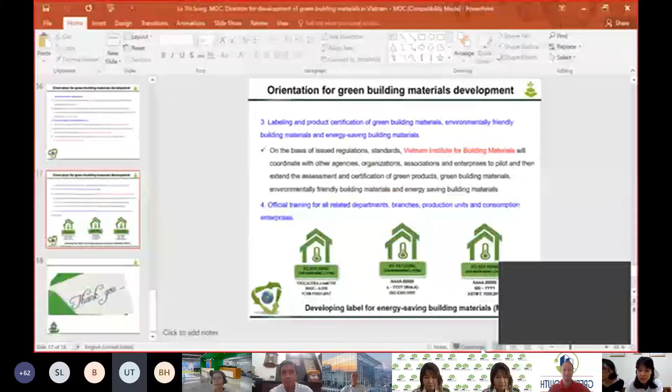Okay, so thank you so much for the introduction. And firstly, I would like to share my screen. Can you see my screen? Yes, we can see it. Okay, so I would like to start.

First of all, thank you so much for the invitation for me to join the conference today. And I would like to talk about the direction for green building materials development in Vietnam. My presentation has four parts: introduction, regulation, implementation status, and the orientation for green building material development.

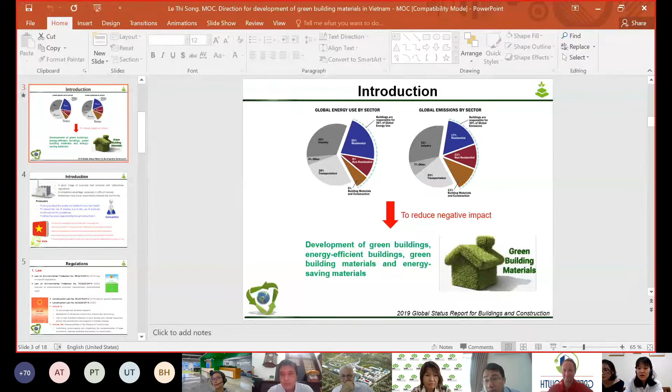Hello, can you hear? There's a little bit of an echo. I hear the sound of something. Hello, can you hear me? If you have two computers in the same place, you need to mute and turn off the speaker of one and just use one. Is it okay? I think it's better now. Yeah, it's fine now.

Okay, so I would like to continue. According to the global status report for building and constructions, buildings are responsible for 36% of global energy use and also 39% of global emissions. So to reduce the negative impact, many countries in the world have developed programs for green building certification and energy efficiency building certification, and the most effective way is to use green building materials.

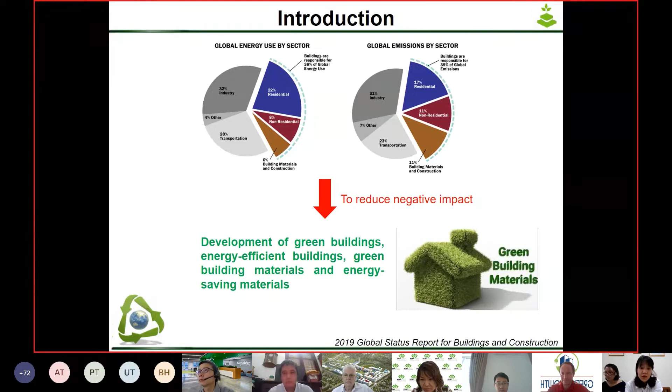As you may know, green building materials have many benefits, and here are some examples. For producers, using green materials creates a good image of a business that complies with Vietnamese regulation, and also creates a competitive advantage, especially in difficult markets. For consumers, using green materials ensures quality and safety for health, and reduces the risk of disease due to the use of products containing harmful substances. And for the state, the development of green building materials will promote sustainable production and consumption, reduce pollution to the environment, and improve environmental quality, and so on.

So in Vietnam, the government has also issued many policies to promote the use of green building materials. Here I show you some main regulations. Firstly, we have the law system.

The Environmental Protection Law No. 55, issued in 2014, has no specific regulation on this. However, the version published in 2020 is the first time the development of environmental economics and environmental audit is mentioned.

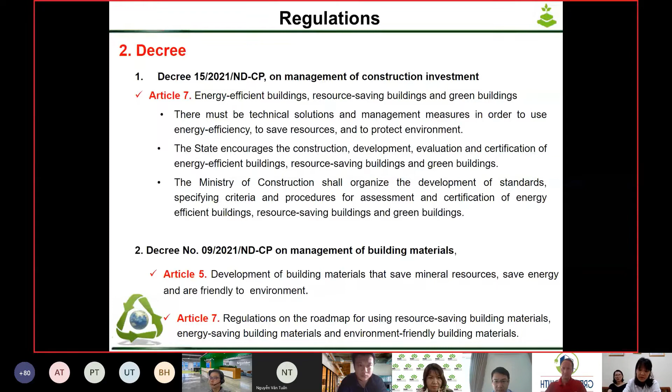Next, we have Decree No. 9, published in 2021 by the government, on management of building materials. There are main points in this decree: Article 5 deals with development of building materials that save mineral resources, save energy, and are environmentally friendly. Article 7 emphasizes the regulation on the roadmap for using resource saving building materials, energy saving building materials, and environmentally friendly building materials.

Next, we have decisions. Decision No. 1216, published by the government in 2012, on the National Strategy for Environmental Protection to 2020 with a Vision to 2030, and also the draft version of this, which is now under consideration and will be published soon next year. Both emphasize that by 2030, they will ensure environmental security and build and develop a green and low carbon economy.

Decision No. 1393, published in 2012 by the government, deals with the national green growth strategy. This decision emphasizes green growth towards a low carbon economy.

Another decision, No. 253, published in 2009 by the Ministry of Natural Resources and Environment, deals with the program of granting eco-labels, the Vietnam Green Environmental Labeling Program, also referred to as the Vietnam Green Label.

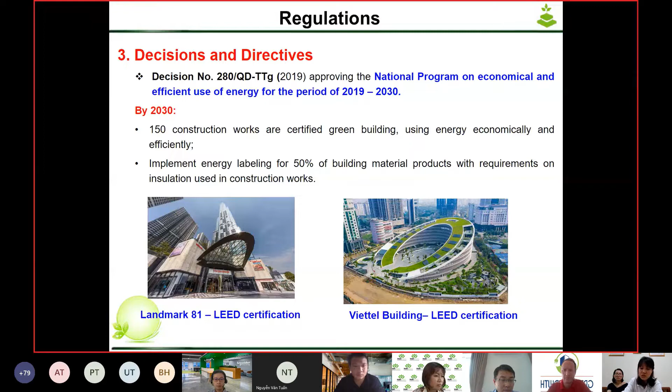For the regulation system, we also have technical regulations and standards. The National Technical Regulation on Energy Efficiency Buildings, QCVN 09, was published in 2017 by the Ministry of Construction.

This national regulation indicates that construction with a total floor area of more than 2,500 square meters must meet requirements for the building envelope, as shown here. For example, for the roof, the maximum thermal transmittance should be 1.0, and for walls, doors, and windows, the maximum thermal transmittance should be 1.8.

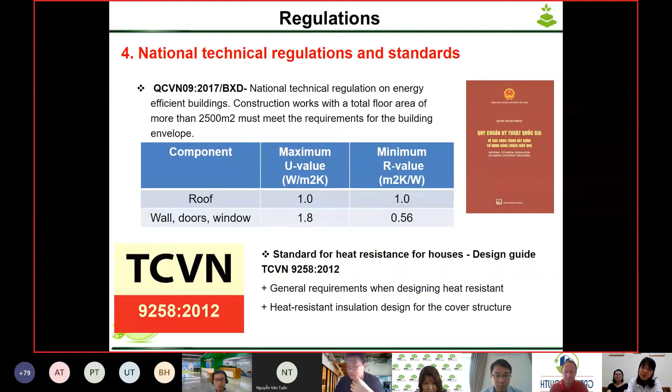We also have a standard for heat resistance for houses, named TCVN 9258, published in 2012. That's all the main regulations relating to the development of green building materials.

I would like to focus on the second part, which is the current implementation status of green building materials in Vietnam. Firstly, the implementation of evaluation and certification of green products.

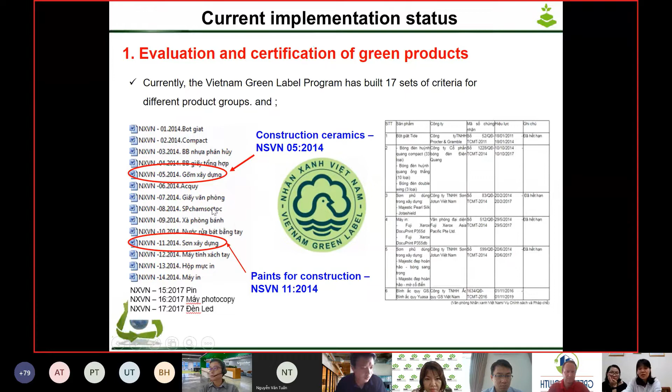Implementation of evaluation and certification systems for green buildings. Currently in Vietnam, there are 5 sets of tools and organizations for evaluating and certifying green buildings that use energy economically and efficiently.

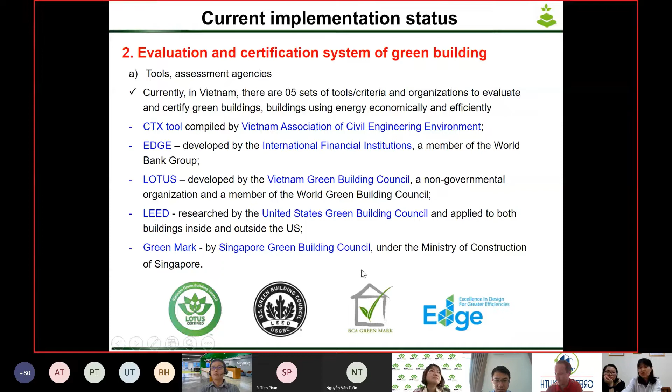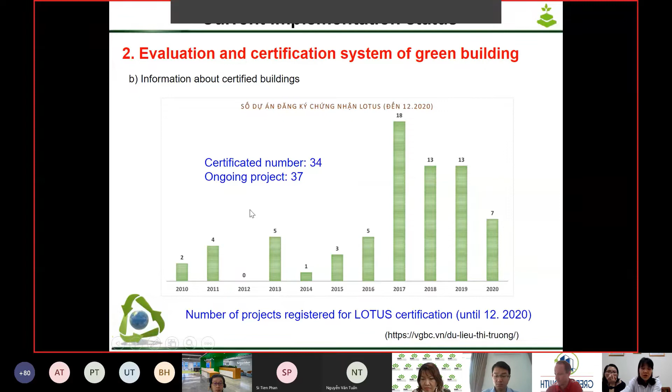This slide shows the number of buildings that received LOTUS certification until 2020. From this data, we can see that until 2020, there are 34 buildings that received certification from LOTUS, and about 37 buildings are on the way to getting certification.

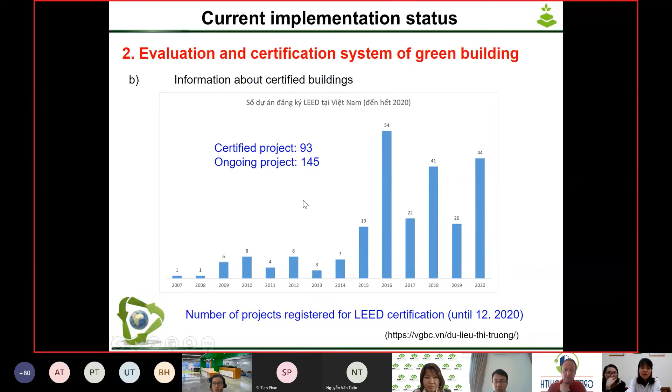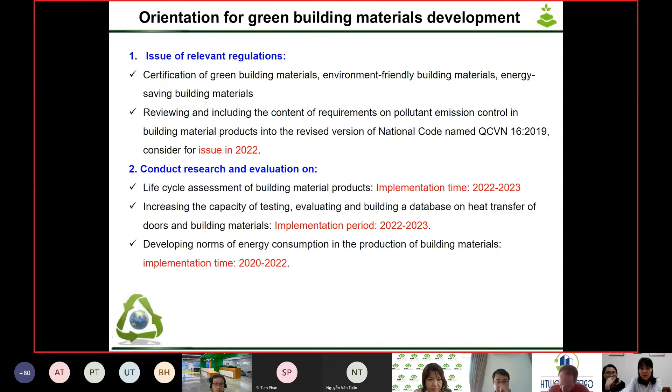That concludes our current implementation status. I will move to the last part, which is orientation for green building material development, because using green building materials has many benefits, as I showed you before. So Vietnam is taking many actions to promote the use of green building materials. Here I'll show you some of the main actions.

Firstly, the government will continuously issue related regulations on certification of green building materials, environmentally friendly building materials, and energy-saving building materials. Also, continuously reviewing and improving the content on pollution emission control in building material products in the revised version of National Code QCVN 16, which was published in 2019 and will be considered for issuance in 2022.

The second main action of government is to conduct research and evaluation on life cycle assessment of building material products, increasing testing and evaluation capacity, building a database on heat transfer of doors and building materials, and developing norms for energy consumption in the production of building materials. These actions will take place in the period of 2020 to 2022-2023.

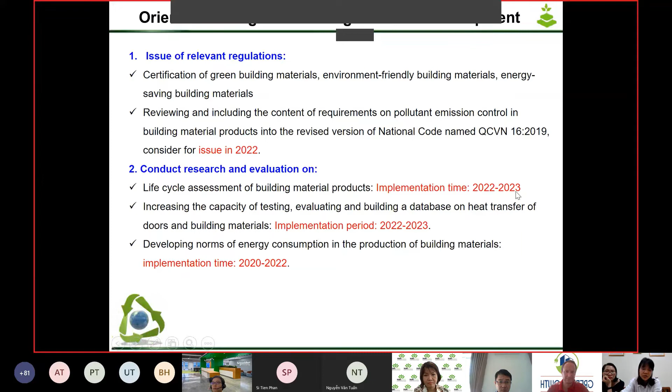The third main action is the labeling and product certification of green building materials, environmentally friendly building materials, and energy-saving building materials. On the basis of issued regulations and standards, Vietnam Institute for Building Materials will coordinate with other partners to pilot and then extend the assessment and certification of green products, green building materials, and energy-saving building materials.

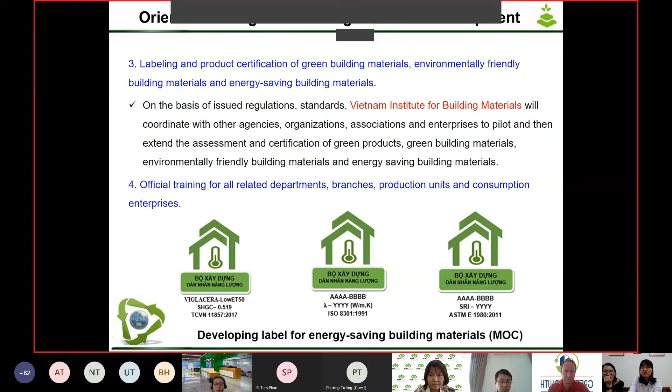The last main action is conducting official training for all related departments, branches, production units, and consumption enterprises to promote the use of green building materials. Is that all for my presentation today? Thank you so much for listening.

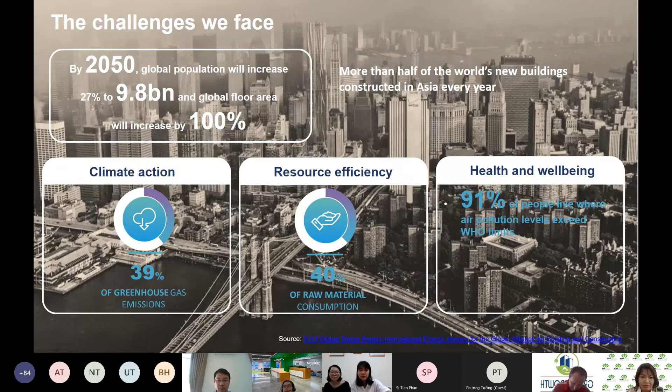Inefficient and unhealthy buildings also negatively affect our health and well-being. 91% of people live where air pollution levels exceed the WHO limit.

Hence, to meet the United Nations Sustainable Development Goals, the World Green Building Council has set a strategy for a few years now focused on three key areas: climate action, resource and circularity, and health and well-being, to drive the impact from the building and construction sector. The World Green Building Council will work with local Green Building Councils around the world to implement the strategy at the local level.

So in this presentation, I would like to discuss the challenges as well as the solutions. How can we implement this strategy? Let's start with climate action.

In 2018, the World Green Building Council initiated the Advancing Net Zero Carbon project. It is a global project working towards sector decarbonization by 2050, and it aims for two milestones. By 2030, all new buildings and renovations will have at least 40% less embodied carbon, and all new buildings will be net zero operational carbon. By 2050, new buildings, infrastructure and renovations will have net zero embodied carbon, and all buildings, including existing buildings, must be net zero operational carbon.

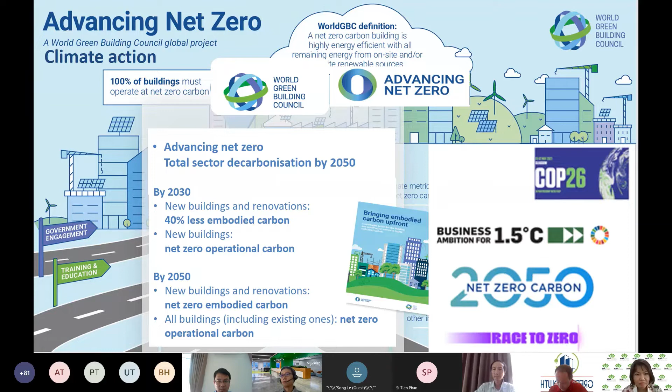So let's have a look at the definition of embodied and operational carbon to bring everybody on the same page. You see here in the picture a representation of the whole life cycle of a building. When we're talking about operational carbon, we refer to the carbon emissions directly or indirectly during the use phase of a building, meaning the energy we use for heating, cooling, and electrical appliances inside the building during its use phase.

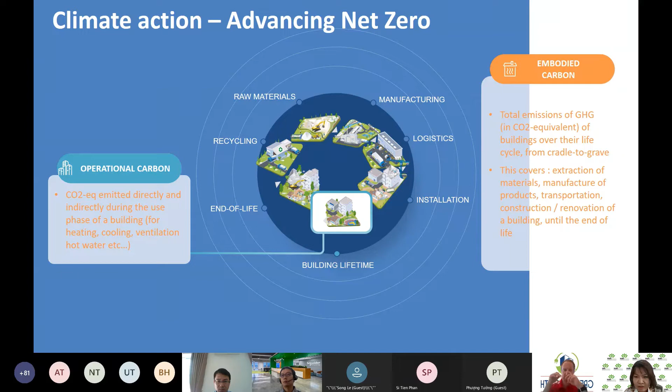Embodied carbon refers to the total emissions of a building over their lifetime, including the manufacturing of raw materials, the construction or renovation of a building, until its end of life. So now our key question: how can we achieve the net zero ambitions?

The answer is we need to reduce carbon emissions at all stages of a building's whole life cycle. So there are three key measures that we can look at. The first is better energy efficiency for the building.

Through deep renovation of existing buildings to reduce energy consumption, we can enhance the thermal insulation of a building envelope, better design with facade orientation, green roofs, or use appliances which have energy efficiency. So energy efficiency is the core driver to reduce operational carbon emissions.

Dr. Song had mentioned a lot about building codes and decrees. These are very crucial to drive this energy efficiency target. Especially in Vietnam, we already have the QCVN 09, the standard that stipulates the requirement for energy efficiency of the building.

The second strategy is we switch to renewable energies as much as possible. In 2017, solar energy played almost no part in Vietnam's energy strategy. But by the end of 2019, Vietnam has surpassed Malaysia and Thailand to reach the largest installed capacity of solar panels in Southeast Asia. So there is a hope for us.

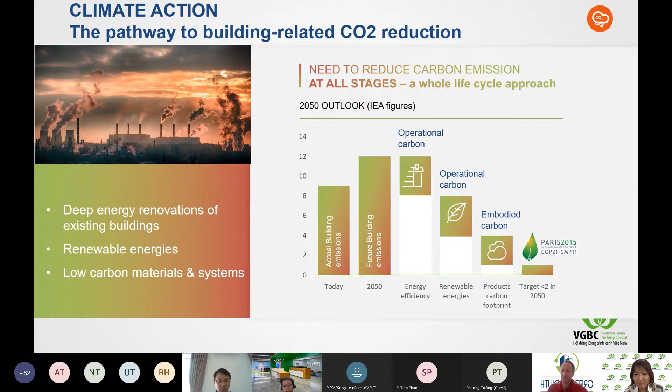The second focus area here is resource and circularity. You can see in this chart, elaborated by the United Nations, that the consumption of resources we use has grown over the years with an acceleration since 2000. The total global extraction in 2017 was 92 billion tons. Compared to 1970's 27 billion tons, it has increased 3 times, while our global population only increased 2 times.

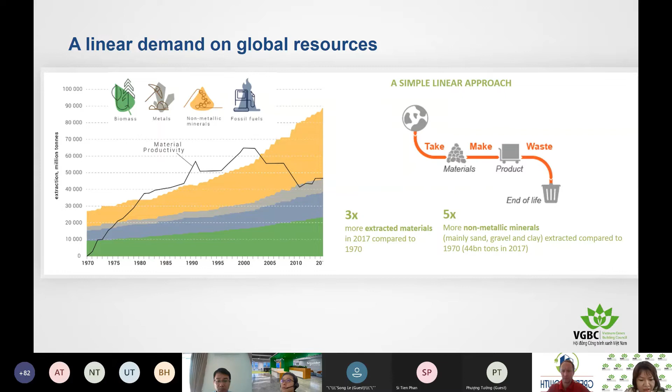And if you look at the charts, you can see 2 important pieces of information here. First, the extraction of non-metallic minerals, shown here in orange, has increased 5 times since 1970. Non-metallic minerals mean sands, gravels, clays - main materials we use in buildings. The second thing we can extract from this chart is the material productivity, meaning the economic output generated per ton of material consumed, has not progressed, has not increased since 2000, represented by the black line here.

So there are consequences of a linear economic approach that we are in, where we take, make, and dispose.

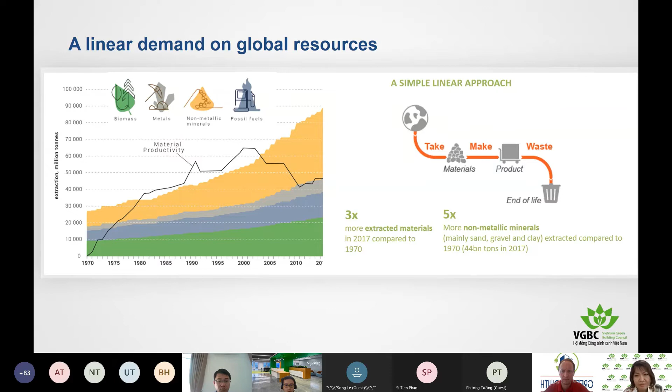If we zoom into sand, which is the most exploited resource worldwide after water, the number one purpose of sand extraction is for concrete, but only less than 5% of the world's sand supply can be used for concrete. My friend Bruno from NC can comment here, but desert sand is too smooth to stick with cement. There's only marine sand or river sand suitable for construction, but we are consuming 2 times more than what normal erosion can produce. And over the last 30 years, the sand demand has grown by 360%, and it will continue to do so.

And we already witnessed the consequences of sand depletion happening everywhere in Vietnam. And behind this situation, with the growth in resource extraction and more waste landfill, it's not only leading to the obsolescence of many virgin resources, but it's also worsening our ecological footprint, the loss of biodiversity, environmental and climate impact - what we can observe daily - as well as negative impact to human health.

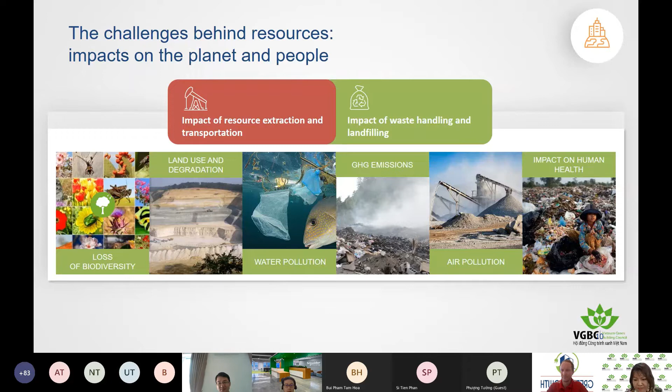And to address these challenges, the only way we can move forward is changing the approach, changing the business model from linear economy to circular economy.

And there are also several business opportunities that circular economy is able to provide. If waste becomes the secondary resource, and circularity is a business model, then waste recycling service can be a business opportunity, and we can capture the secondary resource from the source.

And beyond the traditional way of producing and selling, circular economy also generates a new business model whereby, as a manufacturer, we can provide product as a service. This model has already been done by several businesses like Michelin - they're not selling tires, but they sell the kilometers of usage of tires for trucks, for example. Or some lighting companies, they sell light as a service.

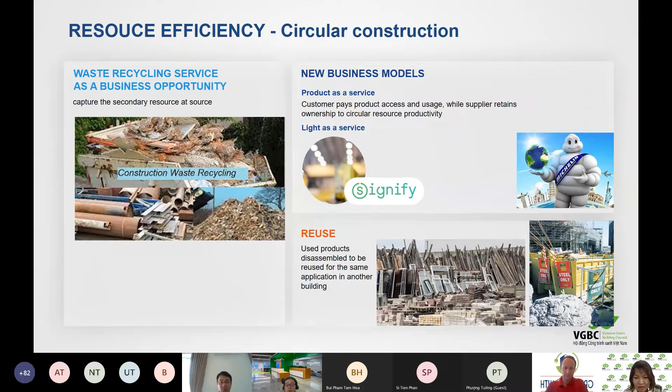The other model is reusing. When we are talking about materials that are supposed to last a long time, this material can be disassembled and reused in a new building when the old building is no longer required.

But to use this approach effectively, it involves the whole value chain of a project. It requires changing the mindset from the architect - design the building so it can be dismantled, design for deconstruction. And for the real estate investor, offer circular building because of the added value. For the contractor, focus on reuse and sustainable building methods and materials.

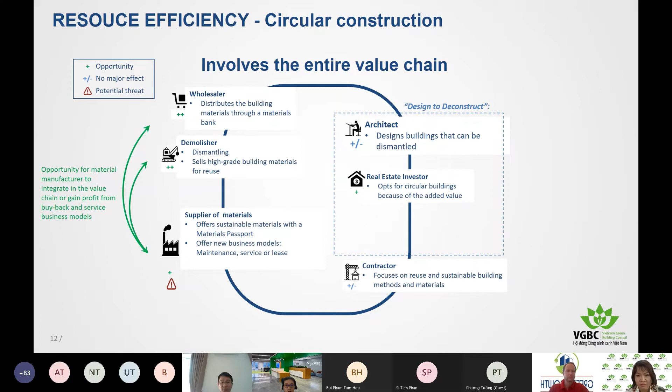The third focus area, last but not least, is health and well-being. Better Places for People is creating causal global projects to analyze the impact of green buildings around the world on the health, well-being, and productivity of people living within them. In the past 5 years, they have published reports on a variety of building types, including retail, homes, schools, and offices. All these case studies demonstrate that the chance of providing positive health benefits for end users is actually taking shape around the world, and there's a strong link between green buildings and the productivity of occupants.

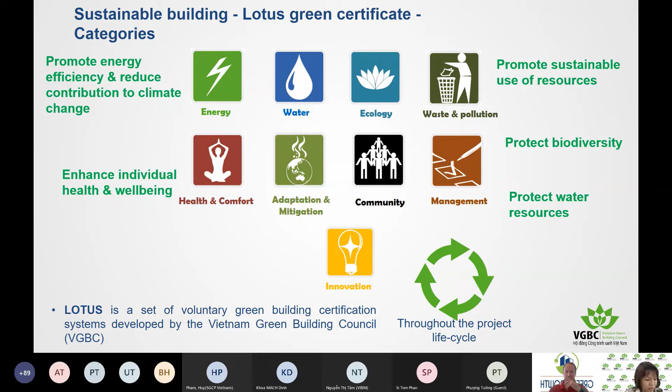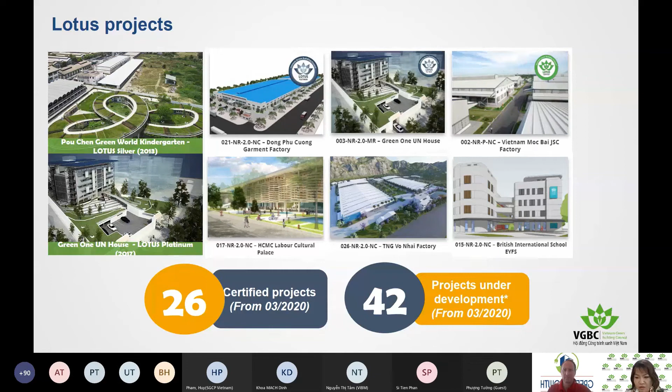Here is some example of Lotus projects in 2020, and I would like to have a close look at the case study of one green building to analyze the environmental impact of a green building. So this case is the Green One UN House. This is a Lotus Platinum project completed in 2017.

In this project, they use 35% of total roof area as green roof, and 77% of landscape that limit the heat island effect. Thanks to this feature, it reduced 29% of energy use. Although they have a lot of landscape and green roof, they still achieve a 44% reduction of water use through the fixture and recycling water system. In this building, they also use 94% reused structure, and on top of the building they have solar panels that produce 110,000 kilowatt-hours per year.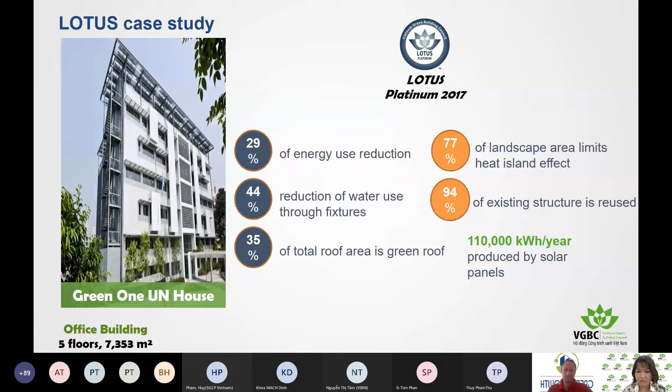So, in summary, we have talked about the 3 global challenges, the 3 global changes that are climate action, resource circularity, and health and well-being. These are the new changes that will redefine how we approach the construction business today, and business as usual is no longer an option. We want new buildings to have low operational and low embodied carbon, using renewable energy. We want buildings using recycled resources, designed to be reused, designed to be dismantled, not to be landfilled anymore. Buildings that provide health and comfort for users, for community. We all share a deep sense of responsibility for the future. Choosing green building will help us achieve those global targets towards a more sustainable world.

So please join us in creating green building for everyone, everywhere. Thank you.

Excellent. Thank you very much, Ms. Hung. Your presentation was really extremely rich in terms of the challenges out there, but also in terms of potential solutions. I think what really stuck out for me is that we really have to collaborate across the complete value chain. Exactly, I think everybody can contribute their part to that.

In terms of the value chain, what we intended to have was a nice coverage in our webinar across this value chain. Normally we would have Sergio, representing the architects, speaking to us now, but literally 10 minutes before our webinar, one of his co-workers called me saying that his wife is about to deliver a baby, and he had to go to the hospital urgently. So unfortunately he cannot be with us here, and the company Saraiva and Associados were not able to give us another speaker to get us through the slides. So very unfortunately, we have to skip this part. The slides will be included, and the contact details for Sergio will be there as well, but unfortunately we cannot hear him talking about the role of the architect. It's a real pity, but yes, that's life, right? We cannot plan everything - well, we can plan, but it might turn out a little bit different.

So unfortunately we have to skip this part, but I would like now to go one step further and talk a little bit from the perspective of a construction material supplier, of INSEE actually, and how INSEE can contribute to a green environment and sustainable cities. I hope you can see my slides and hear me clearly - if not, please shout out. So we heard a lot, especially in the last presentation from Ms. Hung, that construction materials can play a very important role when it comes to green buildings and green cities.

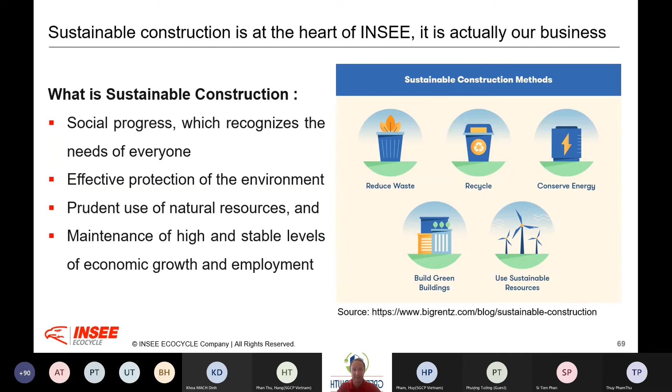So sustainable construction, to be honest, is actually really at the heart of INSEE. It's actually our business, and I will try to explain a little bit what we are doing with regards to that. So there are 5 techniques, according to this website, that are having an impact on sustainable building, and I would like to showcase a little bit on how INSEE is addressing this.

So first, prefabricating materials in controlled environments. So the modular concept, we have been hearing a lot about this as well. This definitely has improved the quality of the buildings, and it can result in much less waste.

Second point is construction waste management. This has been highlighted by Hung very clearly as well, that this is a field where there's a lot of potential to develop, especially here in Vietnam. I believe here we are really just at the very start of doing this. In other more developed economies, there is already a better market for this construction waste management.

Then there is a lot we can do at site in terms of improving the environment, and I will show you a few examples around this. I will show you as well a bit on lean and green manufacturing and how we can reduce the energy and resources we use to produce our construction materials.

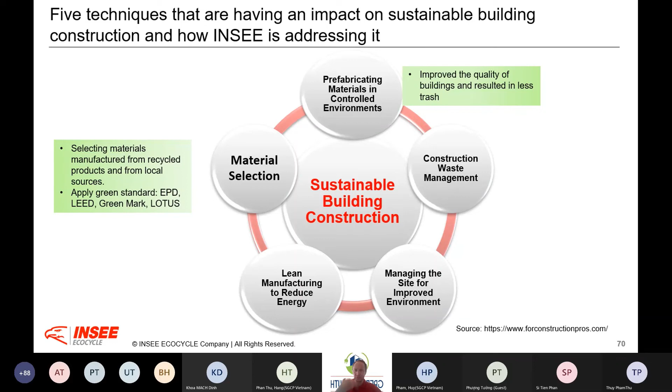And last but not least, of course, again, the material selection that you mentioned. We have heard in the first presentation from Dr. Song that there are green labeled materials out there that should have a lower environmental footprint, and this should definitely be the preferred materials when we go the way forward.

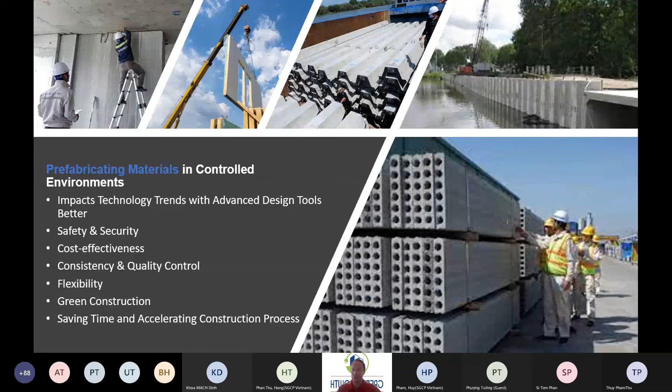So for each point, just a few more details. Prefabricated materials and modular concepts have a lot of advantages: advanced design, economies of scale, safety. Usually it's more cost efficient, it's flexible, and it definitely contributes to green construction, and it can substantially accelerate the construction process and thus save time. So it not only makes sense from an environmental point of view, but as well from an economic point of view.

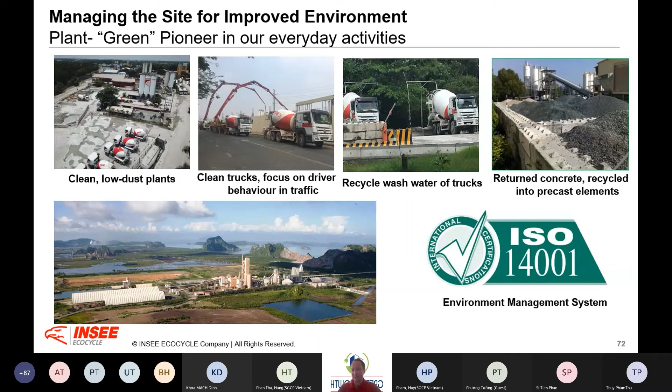The second point is on managing the site for an improved environment. Now really focusing here on cement and concrete, there's a lot that can be done at the production site, but then as well at the construction site, and already here a little bit of construction material and waste management - taking back the concrete that cannot be used, recycling it and putting it into precast elements as one of the options. Then in the bottom you see an aerial picture from our cement plant in Hon Chong. Of course, we are following various ISO certification standards for the environment, for quality, for health and safety, etc.

Now I would like to focus a little bit in the next probably 5 minutes or so on material selection. So we have heard that materials have a significant impact on greenhouse gas emissions, and of course there are different construction materials out there.

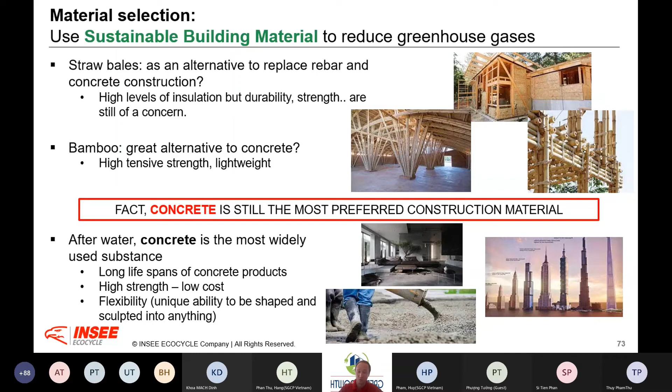So you have certainly all seen and heard about bamboo structure, about timber, using wood for buildings, for infrastructure. Of course this is possible, and there are some successful examples out there. But what is as well a fact is that until today, the most widely used and preferred construction material is concrete. Concrete is actually, after water, the most widely used substance in the world, and it's because of its characteristics: it has a very long lifespan, it has a very high strength, and it's comparably low cost. And it's quite flexible - you wouldn't think about concrete to be flexible, but in fact you can really shape it and sculpt it into almost anything you can imagine, and afterwards it stays in that shape.

On the other hand, as I mentioned before, it's the most widely used manufactured material - worldwide, about 6 billion cubic meters a year. That's a lot. It's needed for infrastructure, roads, bridges, high-rise buildings, etc.

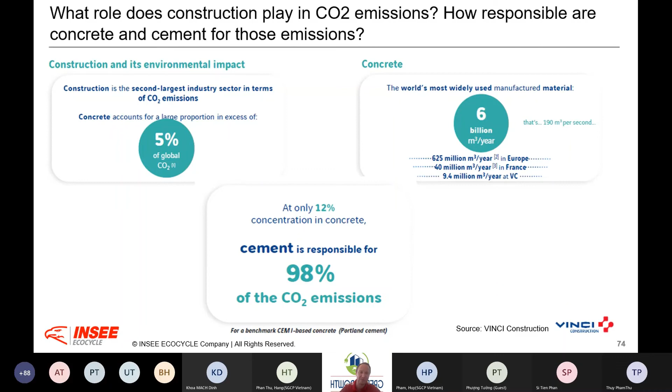Only 12% concentration in concrete is coming from cement, but this cement is responsible for 98% of the CO2 emissions. So let's have a deep dive into the cement part.

There are actually different types of cement. We have what we are calling ordinary Portland cement, OPC, where the main component is clinker and a little bit of gypsum. This has relatively high CO2 emissions.

But what we are seeing more and more is that blended cements, for example PCB40, etc., are gaining traction. Blended cements means the clinker factor is much lower, and additives like gypsum are much higher. So we can use clinker mixed with, for example, fly ashes, pozzolanic materials, byproducts from the steel industry such as blast furnace slag, and limestone, to create a low carbon cement and low carbon concrete.

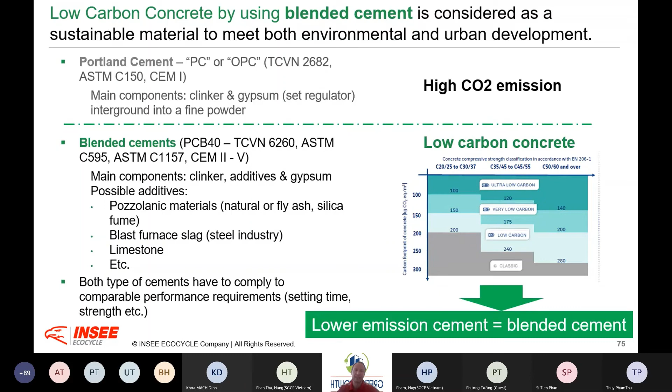This impact can be quite significant, as you can see in the chart on the right side, with different strengths of concrete. I'd like to focus on the comparison between classic concrete, which has maybe up to 300 kilograms CO2 per cubic meter, and ultra low carbon concrete, where this is reduced by half, to only about 120 kilograms CO2 equivalents. So blended cement definitely can have lower emissions.

Furthermore, blended cements have a lot of other advantages. It improves the resource efficiency of cement production - we use less energy, in terms of coal and electricity, to produce the cement. We are reducing the use of natural resources, and we can manage byproducts from other industries in a meaningful manner. This can really reduce significantly the greenhouse gas emissions.

I think we all know global warming and climate change is a very hot topic, especially here in Vietnam, because climate change has a significant impact on Vietnam.

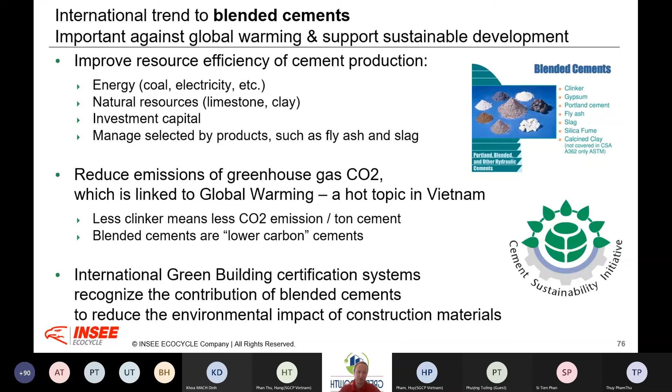Again, here are just a few numbers. When we're talking about clinker, the standard CO2 emissions per ton of clinker is around 700 to 800 kilograms of CO2. If we are using a high recycled product, we can reduce this by more than 50%.

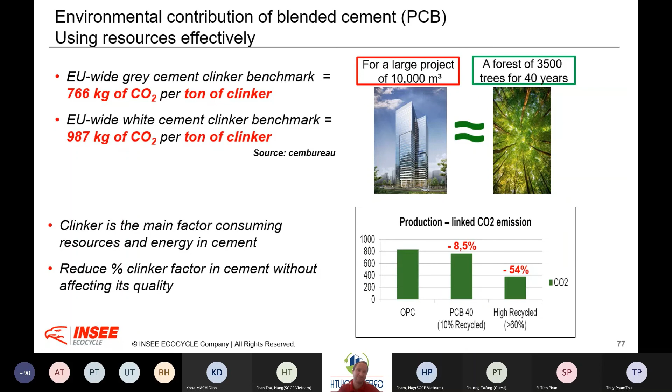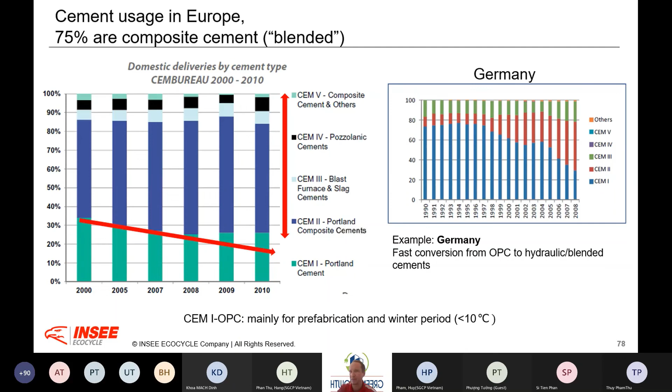Composite and blended cements are really making their way forward. Here's an example from Germany, where in the 1990s most of their cements were OPC, ordinary Portland cements. Today, a few years later, this has been reduced significantly. I think this is a trend we should promote in markets where we are still using a lot of ordinary Portland cement.

In Vietnam, blended cement has quite a long tradition. It's an efficient source of construction material, adapted to the local tropical climate we have here. However, what's quite interesting is that in recent years the utilization of OPC has actually increased a bit, mainly driven by foreign project specifications, especially from the US and Japan, who are not considering the local climate here. It's simply a copy paste of specifications from other countries.

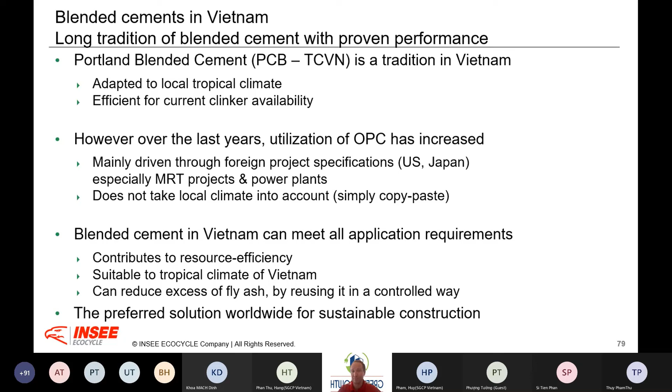As such, we are missing the opportunity to drive more for blended cements here. Overall, blended cements meet all application requirements and quality requirements, so there's no issue at all with regards to that.

Now I would like to give you some specific solutions that we have at INSEE here in Vietnam. First, in terms of green manufacturing and reduction of electricity and energy consumption, we invested in and developed a waste heat recovery system at our cement plant. This was a significant investment, but definitely also a significant reduction of energy needs.

We are producing about 25% of the electrical energy at our cement plant in Hon Chong from this waste heat recovery system. This has a big impact on CO2 reduction, and of course also a big impact on saving fossil fuels and natural resources.

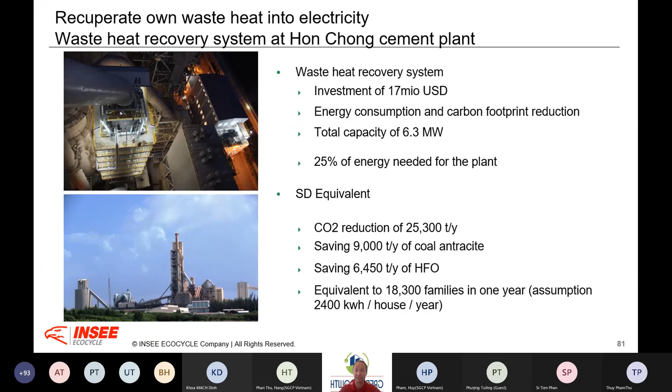Second point, on the thermal energy, we are using a lot of waste-derived fuels in our cement manufacturing process. We are trying to reduce the amount of coal that we use and replace it with waste-derived materials. Today we are replacing about 25% of our thermal energy need with waste materials. I could talk for hours about co-processing and these waste-derived materials, but that's not the topic here. Just would like to highlight this as one of our initiatives.

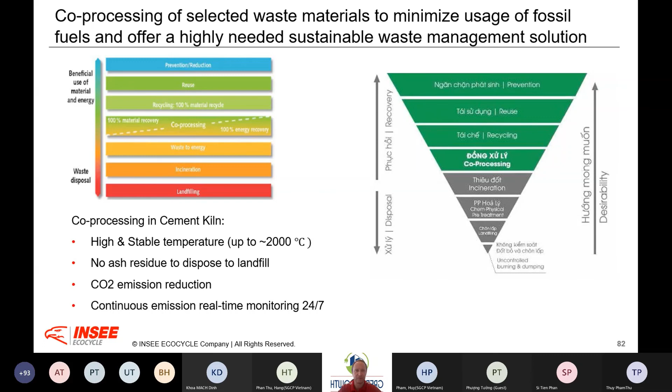The third is about our product portfolio, and it has been mentioned by Dr. Song in her speech at the beginning. We were the first, and if I understand well, until now even the only company in construction materials cement in Vietnam who has the Singapore Green Building product label for all of our products. So we have all blended cements, this for bag cements, and this as well for bulk cement and industrial applications.

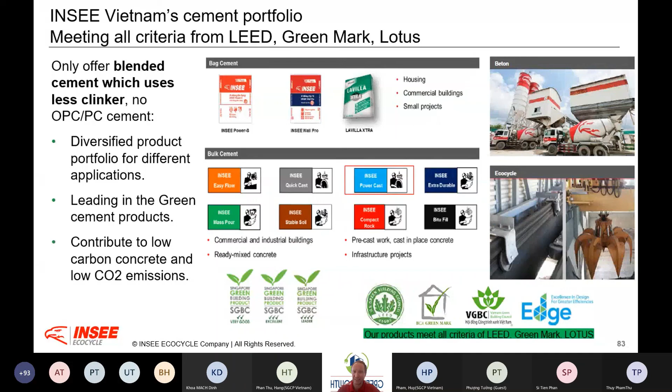We are not stopping here. We are actually right now in the process of developing our EPD, environmental product declaration, for our products. This should give even more transparency on the footprint of our products.

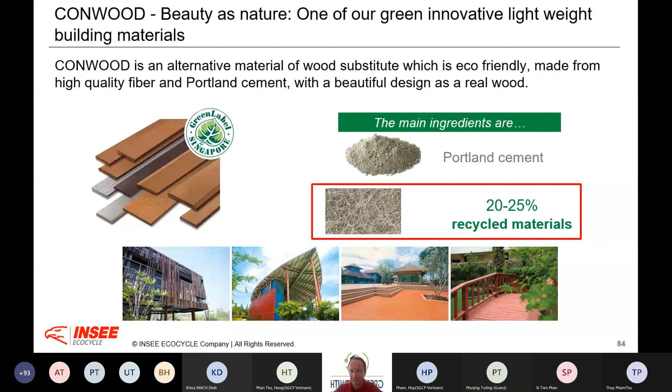Furthermore, we are developing new products. I would like to present Conwood. This is something that actually looks like wood and has all these nice characteristics of wood in terms of visual attractiveness, but it has the characteristics of concrete, so it's very strong, very durable. This uses about 75% cement and about 20 to 25% recycled materials, recycled fibers.

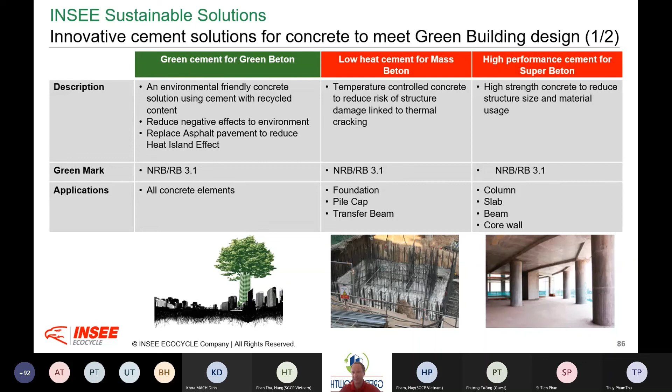Last but not least, a few notes about green building and our contribution to that. Again, we have products at hand that can provide green cement and green beton. This can be for all types of concrete elements, but as well for very specific elements, like the foundation, the beaming, the columns, etc. We have developed specific products that meet the requirements of our customers.

Also very interesting, for example, the hydropave beton, which is basically permeable for water. This can help on flood reduction, and it can help as well in terms of reduction of heat island effects and so on. We are also developing a lot into lightweight beton, and here as well we have a lot of products in our portfolio that can support this.

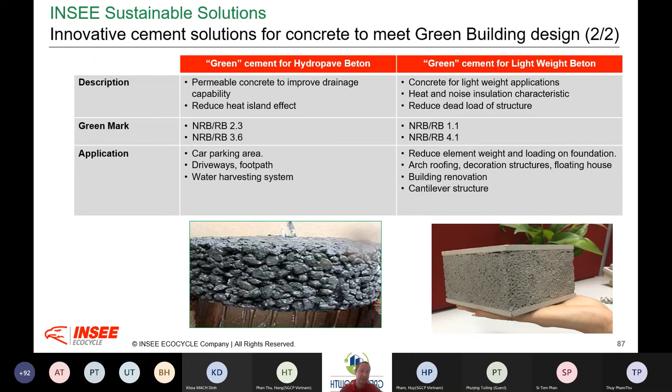With these construction materials, you will be eligible for points in the various green building certificates, be it Green Mark, Lotus, LEED, etc.

Just one reference project, E-Town Central in District 4, Ho Chi Minh City. This is actually where we have our offices, and I can tell you I feel very comfortable in there. This is LEED Gold Version 3 certified, and it has a lot of benefits compared to a traditional high-rise building: more than 20% lower energy consumption, close to 50% reduction in water consumption, and a big reduction in construction waste materials.

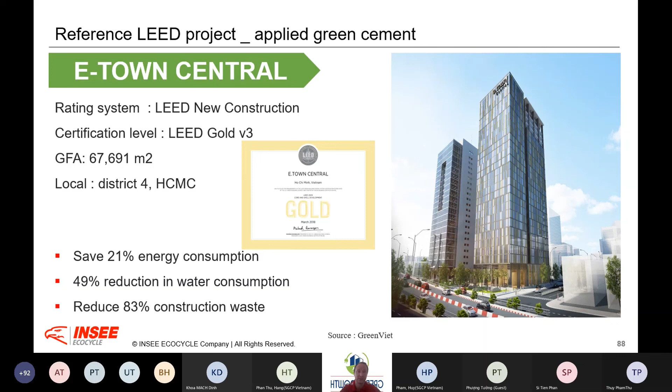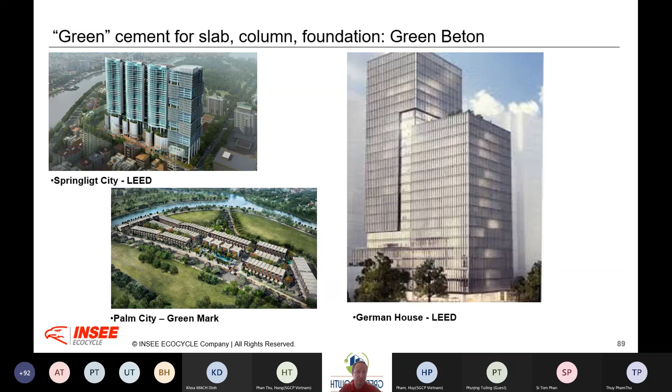Some other examples where our products have been used: the German House in Ho Chi Minh, Springlight City, and Palm City.

To conclude, basically a few points. I believe we know the built environment has a significant environmental footprint; we've heard it from all the other speakers beforehand. We know as well that concrete is the most widely used construction material worldwide.

Now what we have to do is try to reduce and lower the environmental footprint of this concrete and its products. So we have blended cement, green cement, application-specific products that can support sustainable construction of buildings and cities. In INSEE Vietnam, our motto is we build for life, and I believe our expertise and experience over the last more than 20 years can really offer a built environment that is ready for the future.

And if I may conclude, at least from my perspective, I believe that gray—so concrete, cement—and green building, green cities, is actually a perfect match and can be a perfect match.